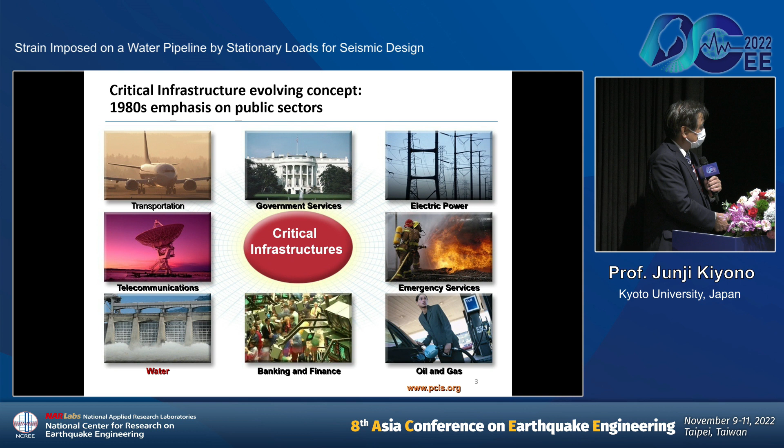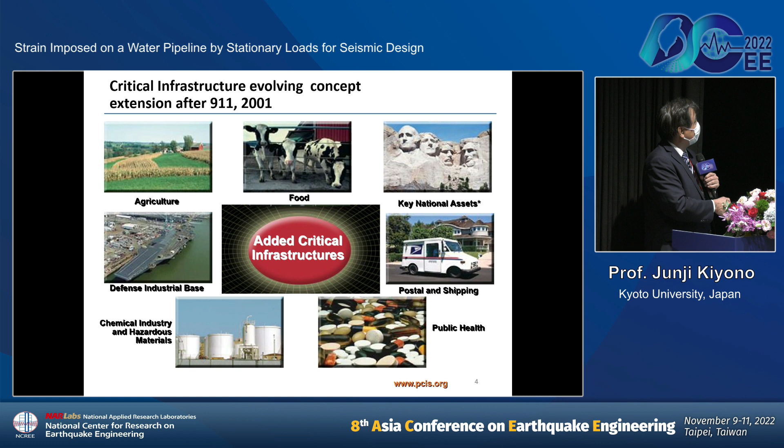Transportation, government services, telecommunication systems, and water - my topic relates to the water supply system. This was also extended to other sectors after 9/11 in the US: chemical industry, agriculture, food, and so on.

This is the lifeline system defined by Duke in 1975. He classified four types: the water supply and treatment system (water and sewage), energy supply system (electric power, gas, petroleum), transportation system (road, railway, harbor, aviation), and telecommunication system (telephone, internet, radio, TV, newspaper, and mass media).

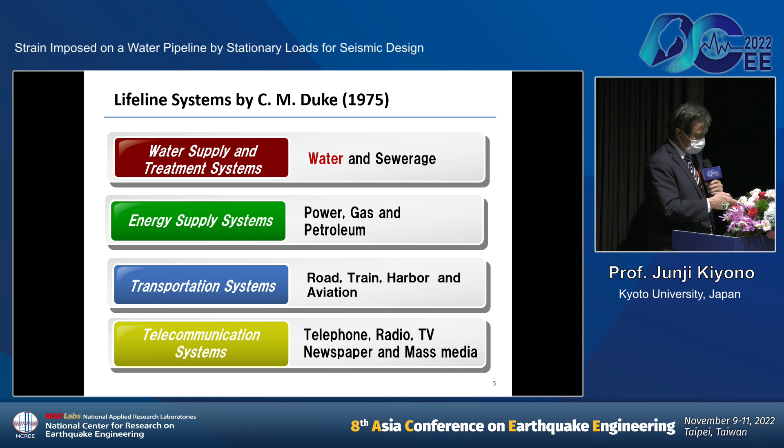We also classify lifelines into two types. One is the one-way source-transmission-distribution, from source to distribution - that includes today's target, the water supply system, as well as wastewater, energy, electricity, and broadcast communication. The other type is network, with many sources and many destinations, such as transportation or telecommunication systems.

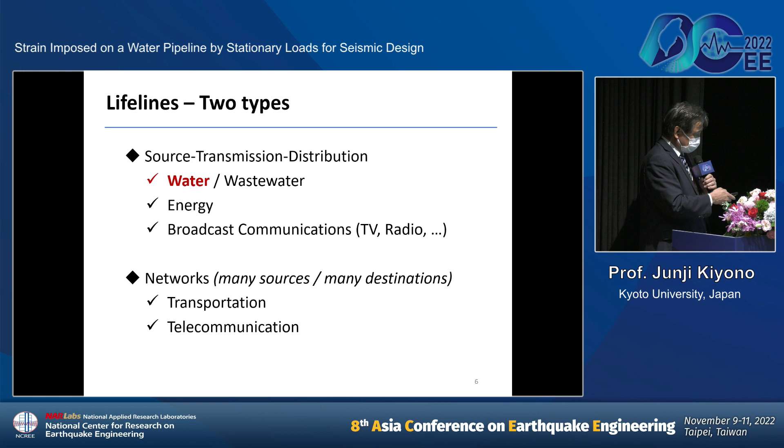Today I talk about the water supply system, which is a one-way system. There are many types of sources: the lake, or artificial sources like a dam, natural lake, river, and well.

We intake the water from this source and convey it to the purification station, the treatment station, by conveyance through aqueduct, canal, pipe, or tunnel. We convey the raw water to the purification station, purify it there, and transmit it to the storage.

Transmission method is gravity and pump-up. This is the storage - reservoir or tank. After that, we distribute the water to the consumer by pipe. There are many types of pipe: iron, cast iron, ductile iron, steel, concrete, and polyethylene. Today's presentation is about polyethylene pipe, storage, and pump stations.

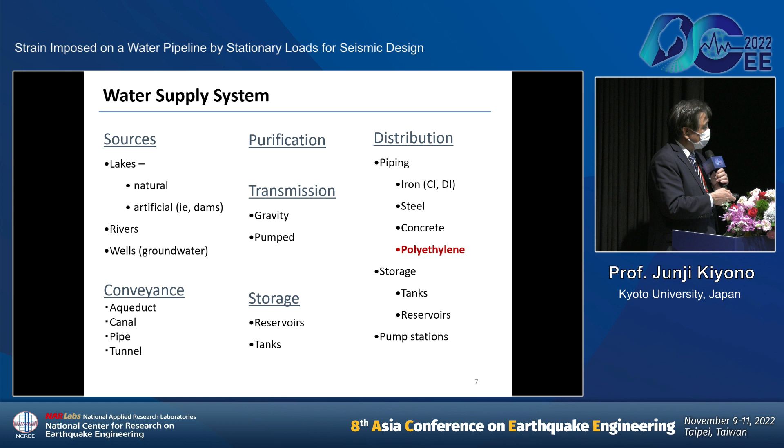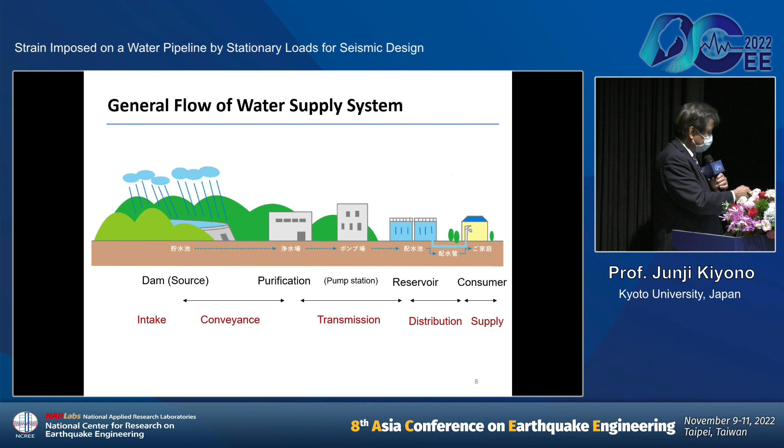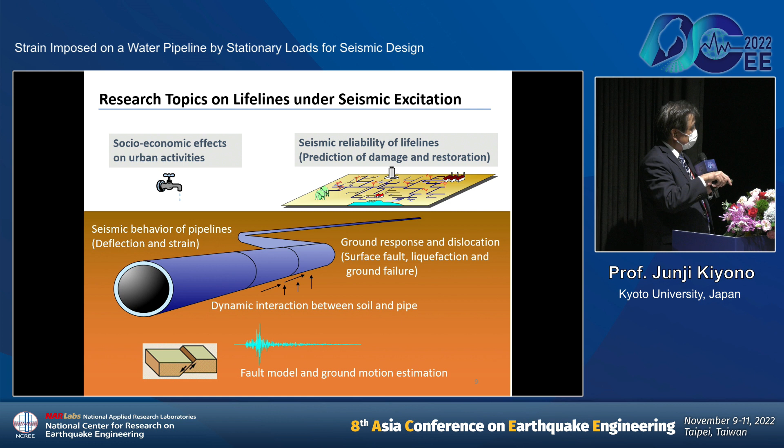I'll talk about damage to pipelines from past earthquakes. In Taiwan, there was very severe damage in the 1999 earthquake. In China, two big earthquakes occurred, in 2008 and 2018. Recently, in the Far East, a big earthquake occurred. In Japan also, severe damage to pipelines has occurred many times.

This is a typical damage photo, taken in 2004 at the Niigata Prefecture earthquake, showing damage to the water pipeline. In this earthquake, the main causes of damage were ground deformation, landslide, large deformation, and liquefaction. This is damage to the water distribution line.

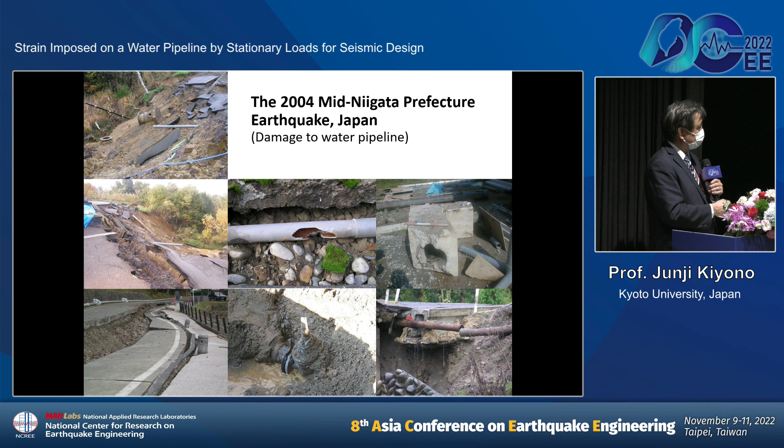This is also damage to a pipeline, but not the water pipe - the gas pipe. The medium pressure gas pipeline was damaged by ground deformation. You can find the gas pipe was buckled inside the soil, here and here.

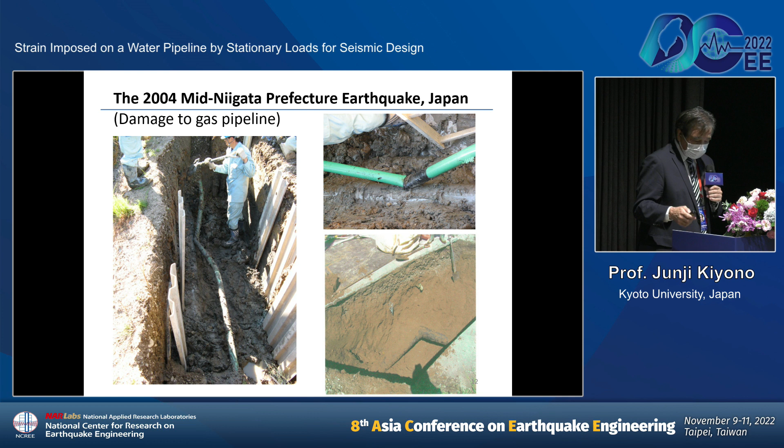So this is the damage to the distribution pipe attached to the road bridge, and the damage caused by tsunami. Tsunami ran up and attacked the bridge and damaged the pipe.

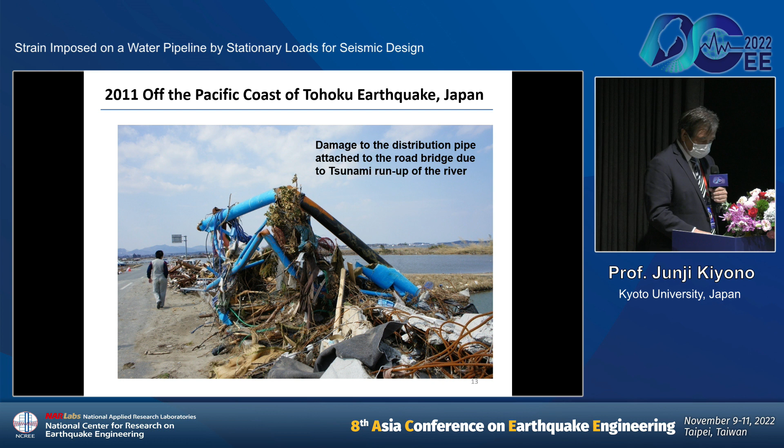In 2011, Tohoku earthquake. And in 2018, in Osaka, a medium class earthquake occurred. Damage occurred to the water transmission line here. This is underground pipe breakage, and the water went up through the road. And this is damage to the transmission line attached to the bridge. Some valve was damaged, maybe by the shock wave and water flow, outside.

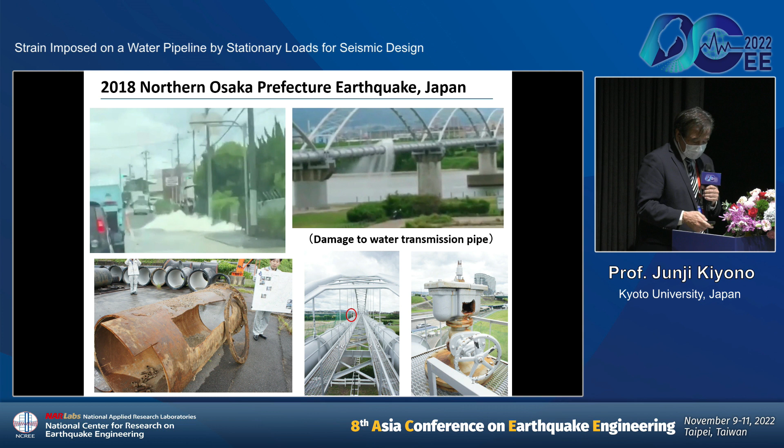So this is the background. Various loads are stationarily imposed on underground pipeline, such as internal pressure, thermal change, temperature change, vehicle weight, and unequal settlement of the ground. The strain of the pipe is generated by these stationary loads.

And of course, we have to consider the behavior during an earthquake. When the earthquake occurs, in addition to this stationary load, the ground motion causes strain to the pipeline. If the total strain by the stationary load and the dynamic load exceeds an allowable level, the seismic safety of the pipeline is not ensured.

Therefore, accurate evaluation of the strain of the pipe is indispensable for the assessment of the seismic resistant capacity and durability.

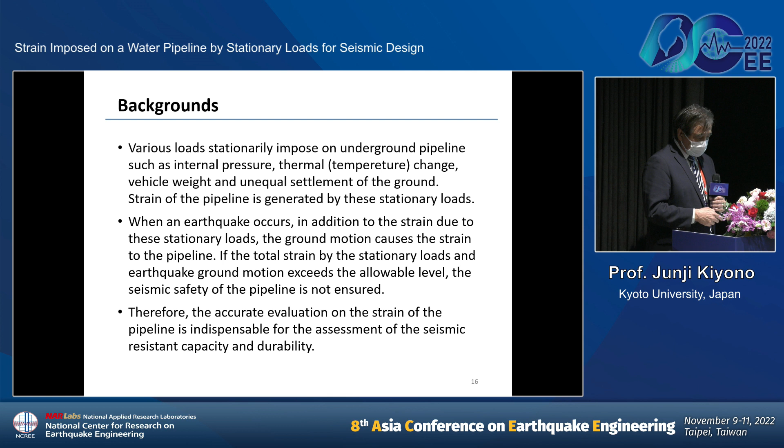So there are many pipe types. This is the steel pipe, welded and spiral welded steel, or flange steel pipe. The upper right is the cast iron or ductile iron pipe. And the bottom left is concrete pipe. Many, many types of pipe exist.

And this is the polyethylene pipe. The history of the polyethylene pipe is relatively new compared with this metal pipe. But the total length is increased more and more, and it has high seismic capacity and is flexible. Compared with the metal pipe, it is very, very flexible, lightweight, and low cost.

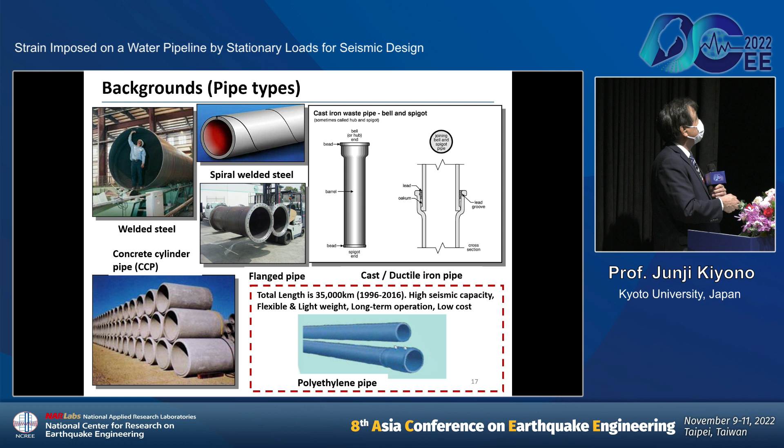So this is a schematic diagram showing the type of behavior difference between the metal pipe and polyethylene pipe. The left figure shows metal pipe. Metal pipe buried in the soil, earthquake occurred, and the metal pipe, as you can easily imagine, has very, very large stiffness.

So sliding easily occurs between soil and pipe because the pipe is very, very rigid. So the elongation of the pipe is very, very small, and the relative displacement due to sliding is very large. So the effect of surrounding soil is very, very small.

But today's target, the polyethylene pipe, the schematic diagram is this. Earthquake occurred, and this is the polyethylene pipe, but the stiffness is very, very small. So stiffness is very small, so it behaves with the ground. So the elongation of the pipe is very large, but the sliding is small, so the relative displacement is very small. So the effect from surrounding soil is very large. So it's a very, very flexible pipe.

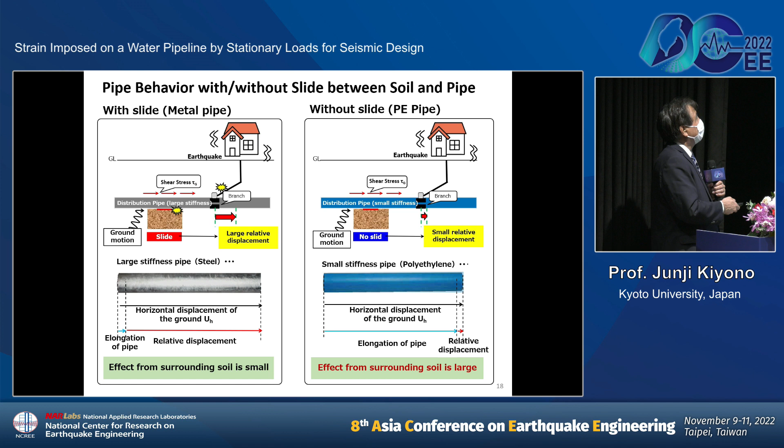So this is the model equations proposed by Japan Water Work Association, JWWA. The Seismic Design Guideline of JWWA for water distribution pipe indicates the equations to calculate the strain by stationary load. The strain by these loads is added to earthquake-induced strain and evaluated, as I explained before.

Number one and number two: the axial strain by internal water pressure is this, and the axial strain by thermal change is this. Number three is the axial strain by vehicle load, like this. And number four is the axial strain by unequal settlement. There is an embankment, soil embankment on the surface ground, and unequal settlement would occur there.

But this third and fourth are due to the bending of the pipeline. And also they consider the effect of the soil, because the calculation was done using the calculation of a beam on an elastic bed. So they consider the soil effect.

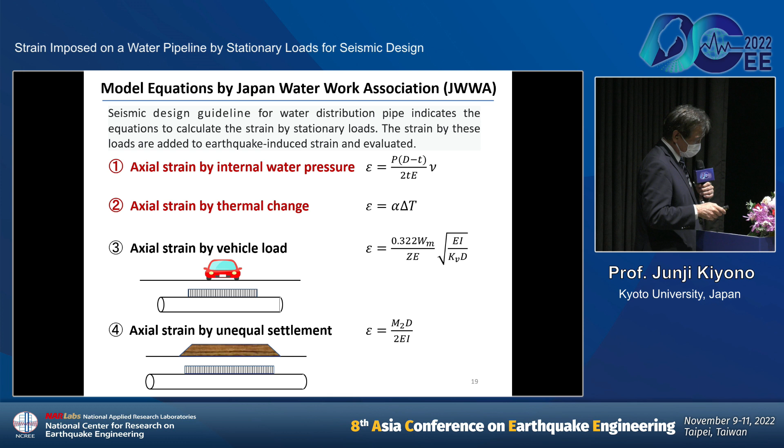But today, I focus on these two axial strains induced by internal water pressure and thermal change. So, the problem statement and objective.

As I explained, the model equations one and two do not take into account the effect of surrounding soil; it's just a calculation of the pipe alone. The relatively small stiffness pipe, such as polyethylene, is strongly affected by the condition without soil, because the soil constrains the movement of the pipe. So in the current situation, they don't consider the soil effect.

Therefore, here we propose accurate equations taking into account the effect of surrounding soil by introducing the soil spring. The model proposed is verified by comparing with past experiments and shows the difference of the strain calculated without the soil spring.

This diagram shows the internal pressure from the inside, and this is the equation for the elongation caused by the temperature change.

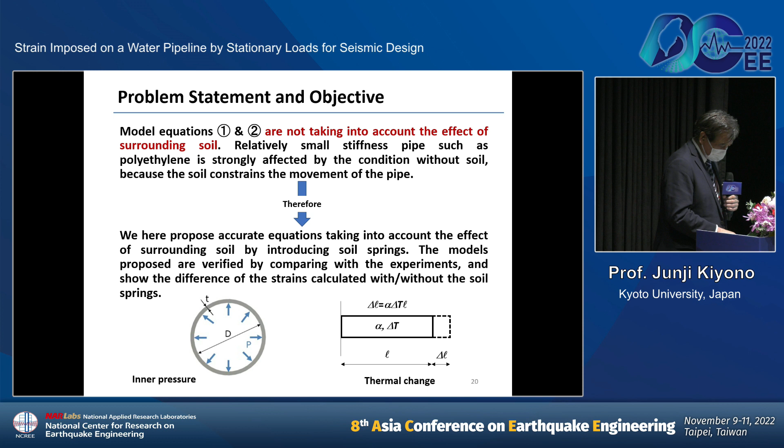The methods and the results.

So this is the proposed pipe model, taking into account soil spring. This is pipe touched soil spring, a very simple model.

So introducing the soil spring and making the equation. This is a small portion from the equilibrium of an infinitesimal element, and we make the equation by considering this equilibrium. This is, U is the total elongation. UA is due to the axial stress equilibrium of this stress, and UB is elongation due to the internal pressure or thermal temperature change.

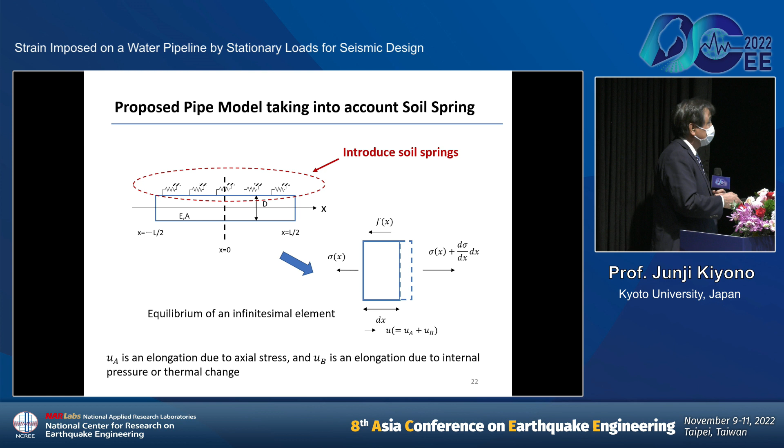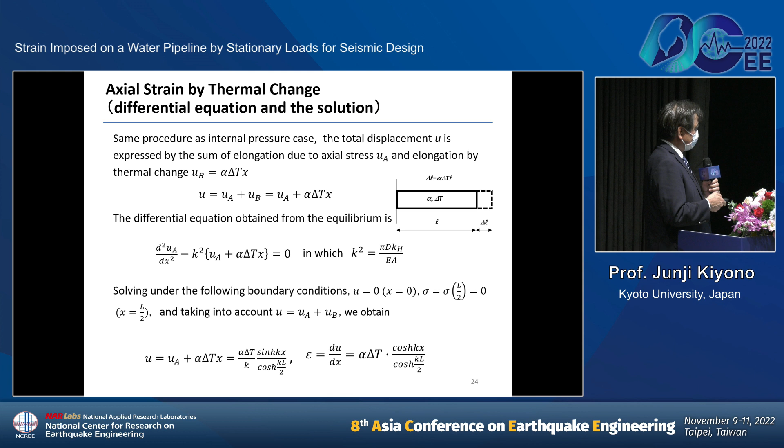This is in case of the temperature change. The procedure is the same. Total displacement U is expressed by the sum of elongation due to the axial stress, UA, and elongation by temperature change, UB. And we make the differential equation with the same procedure, and given the boundary condition, we finally get this displacement and strain.

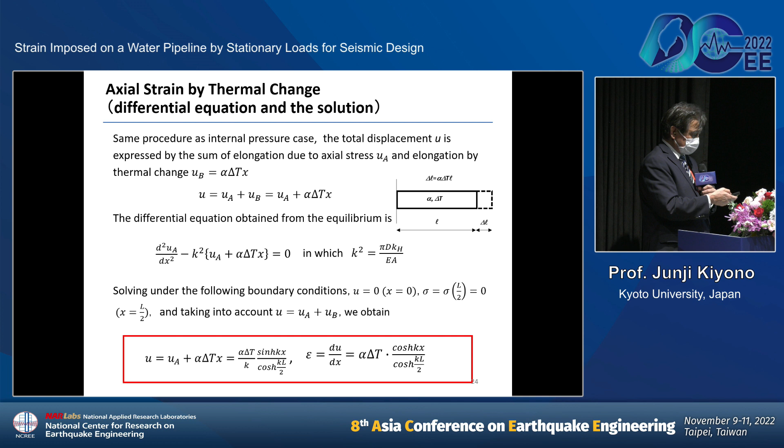So we compare this theoretical result with the experiment. The experiment outline is like this: the thermal change is about 25 degrees, outside of the ground, and internal pressure changes from 0 to 1 megapascal under the same buried condition. And overburden is 1.2 meters.

That is the decomposed granite, the backfilling soil. And the length, pipe length is 20 meters, and the buried part of the soil is 15 meters. And in each 1 meter, they put a strain gauge.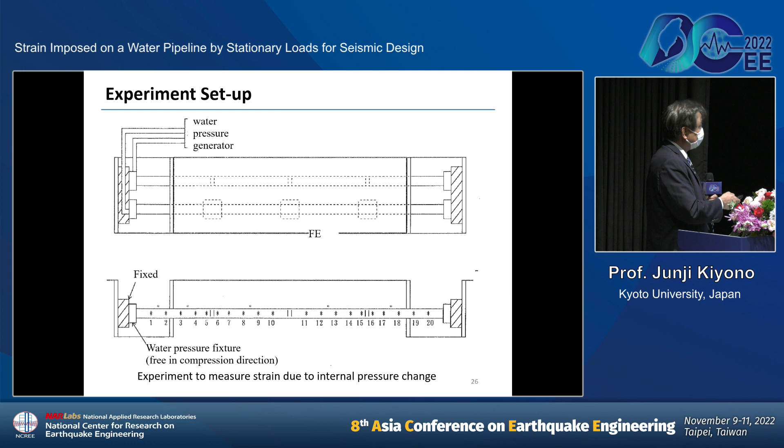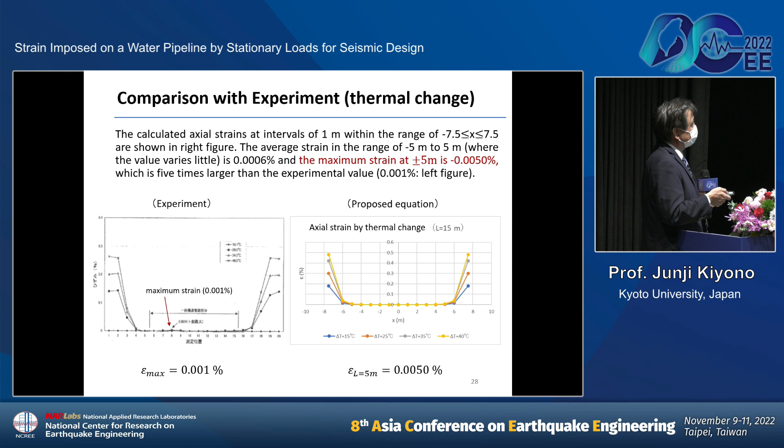Next is a comparison case of the thermal change. So this is a result of experiment, and maximum strain is 0.001. And from the proposed equation, the value is 0.005. So this value is 5 times larger than experiment.

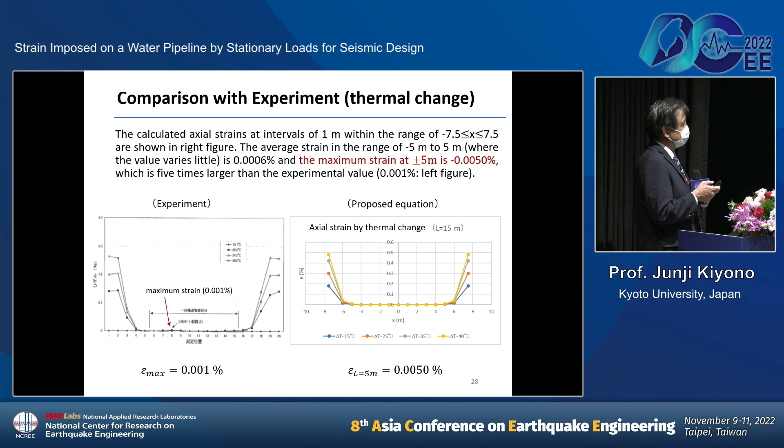Someone thinks this difference is very large, and someone thinks this difference is very, very small. But we can find, if we compare the model equation - at first I explained this, proposed by JWWA - they don't consider the effect of soil, surrounding soil. The calculation value is 0.229 in case of internal pressure.

In case of thermal change, the axial strain is 0.3%. So the bottom is comparison of strain by proposed equation, experiment, and model equation.

So again, the strain by internal pressure change: the proposed equation is 0.004, and experiment is 0.01, but the current model equation is 0.229. In the thermal change: 0.005, 0.001, 0.3. So this is several tens of times larger, and this several hundred times larger.

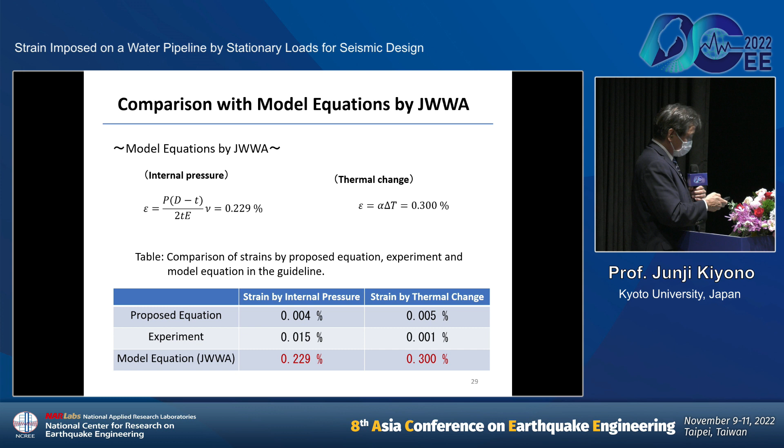So this is a conclusion. In this research, we consider internal pressure and temperature change, which are stationary loads that might cause significant deformation of pipe in the axial direction, and proposed the formulation by taking into account the effect of surrounding soil. We compared the result with experiment to verify suitability and usefulness. We found that the JWWA model equation, which does not take into account the constraint imposed by the surrounding soil, yields excessively large strain.

It is expected that the effect of surrounding soil should be taken into account for the calculation of strain by the stationary load in seismic design of relatively low rigidity pipe, such as high performance polyethylene pipe.